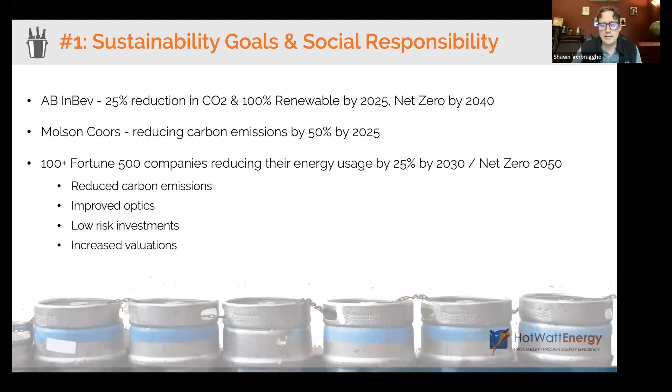I think eventually we should all do our part to roll up to that. One of the big overlooked things about energy efficiency is all the benefits that come in the workplace, especially for employees—like increasing light levels with lighting and reducing hot and cold spots in the office.

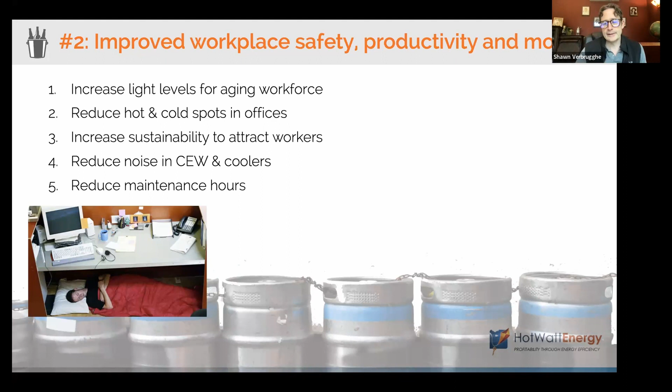Increasing sustainability helps attract workforce—the younger generations. I've written a bunch of papers on this about how that's really one of the drivers for the millennial generation. Attract them and keep them, and show them we're doing good stuff.

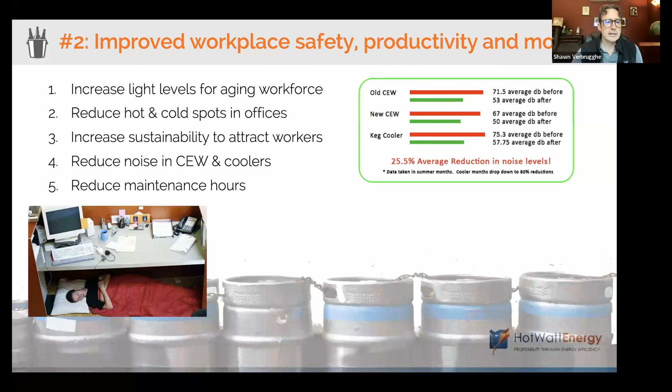Reducing noise in CEWs and coolers—for those who have done a variable air volume project in your keg cooler or CEW, we can reduce noise levels drastically, which is a huge safety increase. And then there's reduced maintenance, obviously.

This tells a story about cutting your energy usage 30%, which can increase your bottom line profitability by at least a couple percent. It just depends on how big your energy budgets really are.

Average IRRs, which are important to look at for building retrofits, are typically 20-25% or greater, sometimes up to 50, 60, 70%—which is what's really attractive about energy efficiency. It's not as sexy as solar, but the ROIs are much better. The average payback on an energy retrofit project is 25 to 30 months.

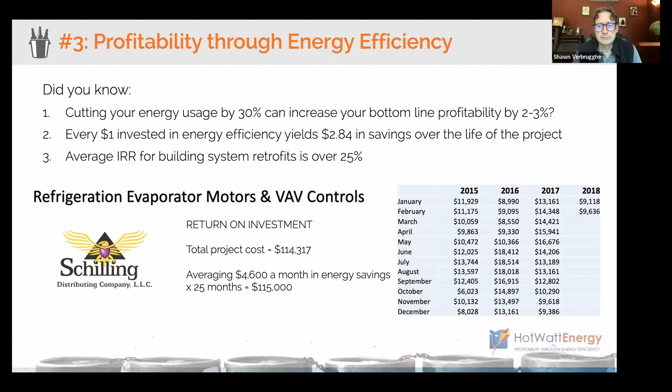There's a project we did for Schilling Distributing—let's see, it was about $4,600 a month in savings. I won't get into all the details on that, but this is where I try to use Yoda as my guide here.

I think these are the steps that I really try to get people to look at taking, and first is Energy Star benchmarking.

Energy Star—most of you know that brand—has the commercial buildings energy use portfolio, which I'll show you in a second. Really, benchmarking is about understanding how efficient my building is right now.

You'll be able to compare it to other buildings like yours in your region, which is important. Second is understanding utility incentives and tax deductions that might help drive the paybacks down and help the projects move.

Obviously, identifying the projects is key. Figuring out how to implement them and how to fund them is something we should talk about, and we will talk about briefly.

What's the overall goal? Improving your NOI. I know each and every one of you are very efficient in your operations already, so to me the energy budget is kind of like this black hole a lot of times where it hasn't really been looked at or considered. If it hasn't been, this is probably the road to start on.

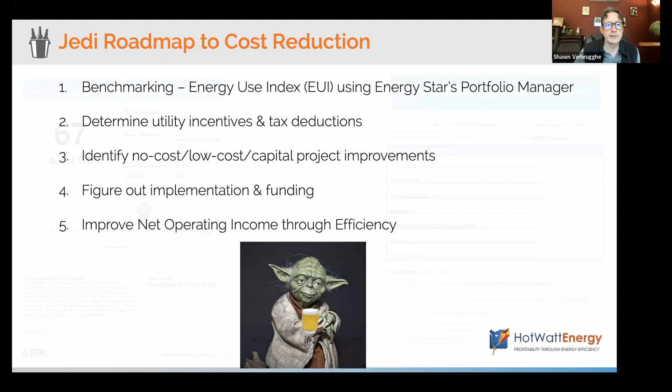So we talked about Energy Star, and this is an example of a scorecard on your left—just like a mock-up. If you're scoring 67 out of 100, you have a lot of room for improvement.

A score of 75 or above will allow you to become Energy Star certified—basically you get a sticker you can put on your front door. But more importantly, it shows where you're at in the big scheme of things.

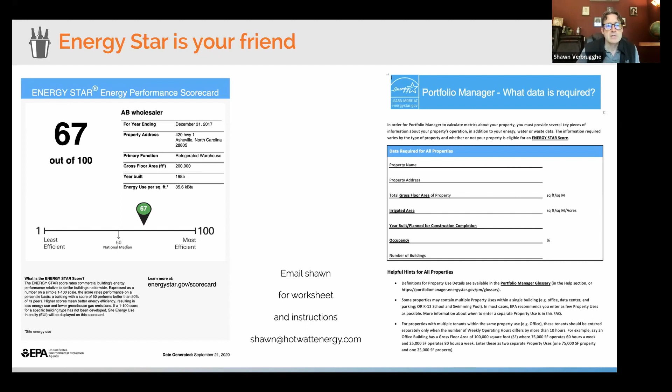The cool thing about Energy Star is if you're a 67, you can say you want to shoot for a 77 or 85 or whatever that number is, and figure out how much energy savings dollars that would equate to, which is really cool. So you can kind of reverse engineer it.

Your utility, a lot of you guys are on Consumers and DTE. This is kind of the map of everything. If you're not on Consumers or DTE, you can use the DSIRE USA website. You can type your zip code in there and it'll pull up your electrical provider and their business incentive or commercial incentive program, usually called one of those two things.

These are the links to Consumers and DTE. I'll tell you that each one of these programs, and pretty much all programs across the country, have over 100 incentivized applications you can somehow take advantage of. You're not going to use all of them, obviously, because they're categorized into a lot of different things, and a lot of them are lighting, but that's only a chunk of them.

For those of you who have done lighting and gotten a rebate already, you understand the power of, number one, the reduction in energy use, number two, the kind of incentives that can come with it, and the impact it can have visually in your workplace.

The custom incentive is what we try to drive with energy retrofits, and it usually ends up to be a little bit more money. That could be a sidebar conversation if anybody wanted to have it.

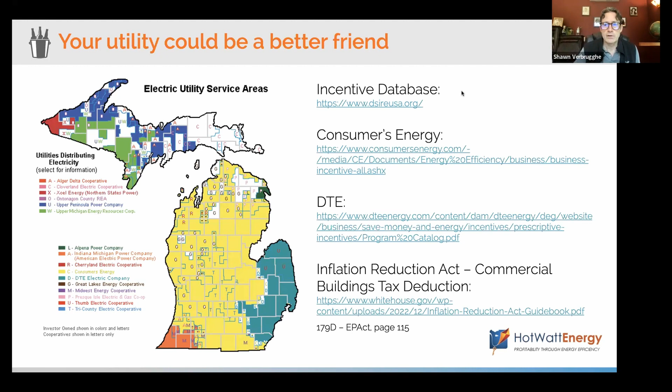All right, moving along here. Let's talk briefly about low-hanging fruit. The number one outstanding thing I try to really push people to do is preventative maintenance and cleaning. This first one is some fellows I was just talking to in Wyoming.

If you look at how dirty these coils are, it's insane, the inefficiency that comes along with that. So clean coils regularly in anything that has a coil, whether it's refrigeration, evaporators, condensers, HVAC, rooftop units, replacing belts, replacing filters, and especially recharging refrigerant, making sure your refrigerant is at the correct capacity on an annual basis.

All of those things right there could save you easily 15%, give or take, obviously if you're out of whack. Now, hopefully everyone has a preventative maintenance contract already in place, but if they don't, I highly encourage you to look at that on an annual basis. It's almost free by the time you take the maintenance reduction out of it that you'll achieve.

Number two, evaporators and controls project. We've done this for several Michigan distributors already throughout the years. These usually have paybacks of 1 to 3 years. We'll talk about that in a second.

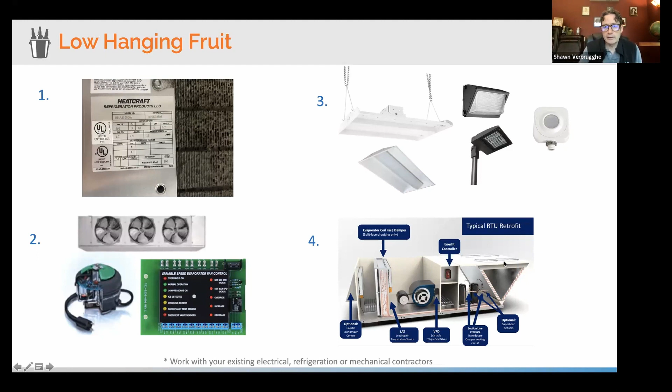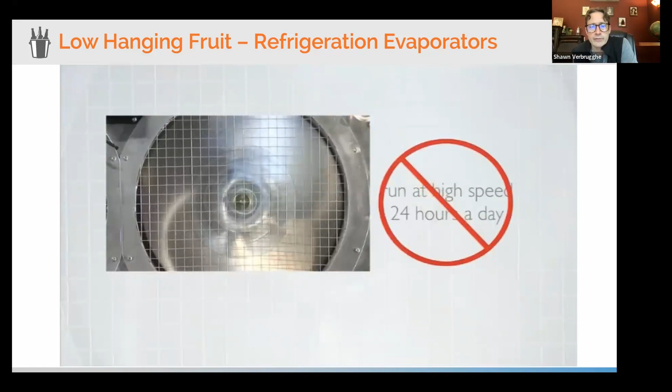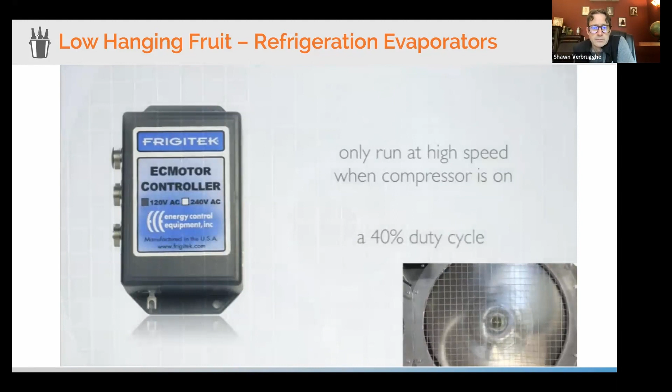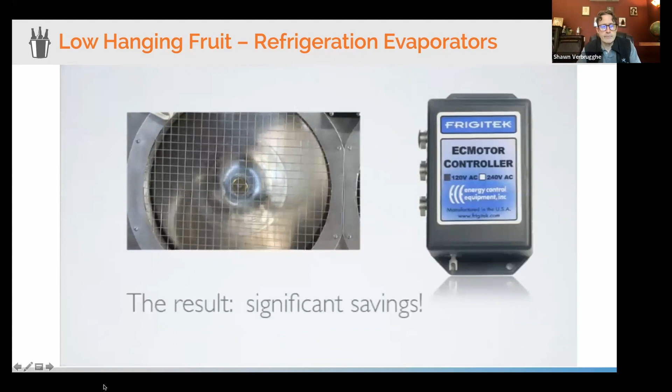All right, so this is a video, I'm just going to let it rip. This is about motors that run at high speed 24 hours a day, for those of you who have refrigeration in a walk-in or a keg cooler. When the system compressor is operating, which for most units is about 40% of the time, that means for the other 60% of the time, the fan motor RPM can be lowered dramatically while still providing the necessary airflow in the box. The result: significant savings. Frigitek works in conjunction with the new 2-speed EC motors that are far more efficient than the shaded pole motors currently found in most walk-ins.

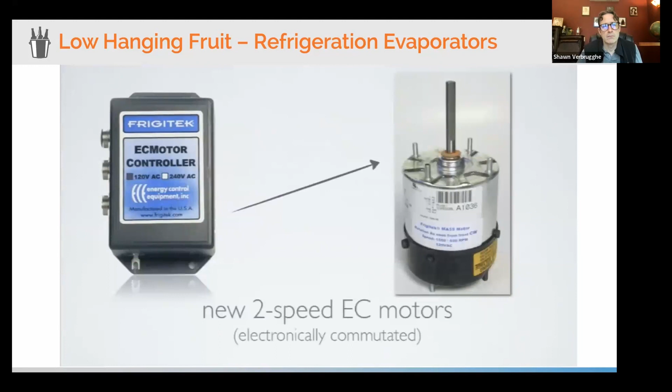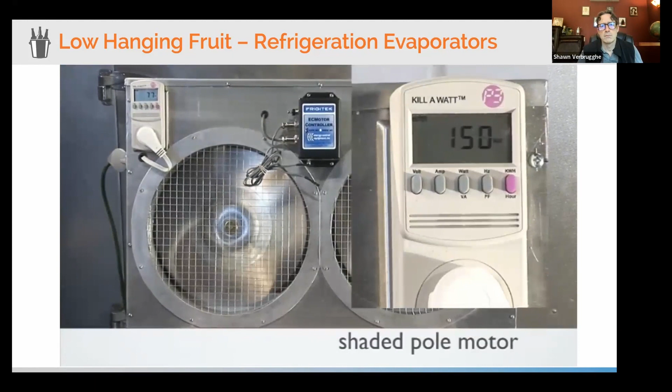Here's a demo unit that will clearly show the effectiveness of Frigitek. To the right is a fan being driven by a standard shaded pole motor. It's consuming about 149 watts. On the left is a new 2-speed EC motor, consuming about half the energy, or about 76 watts.

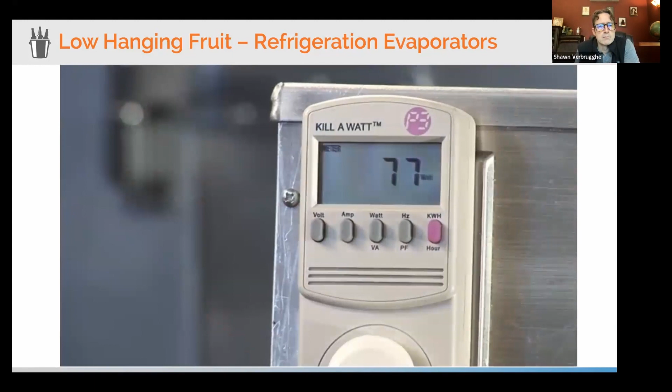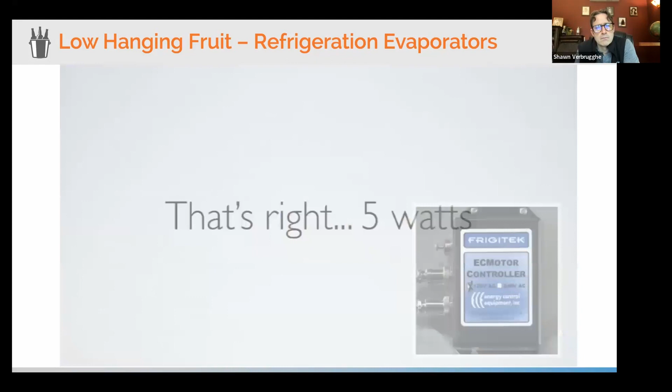Now we will simulate the compressor off cycle. The Frigitek controller will slow the EC fan motor to 600 RPM, and it's now only consuming about 5 watts of electricity. That's right, 5 watts, when before it was consuming close to 25 watts 24/7. When you do the math, this amounts to about an 80% reduction in power usage.

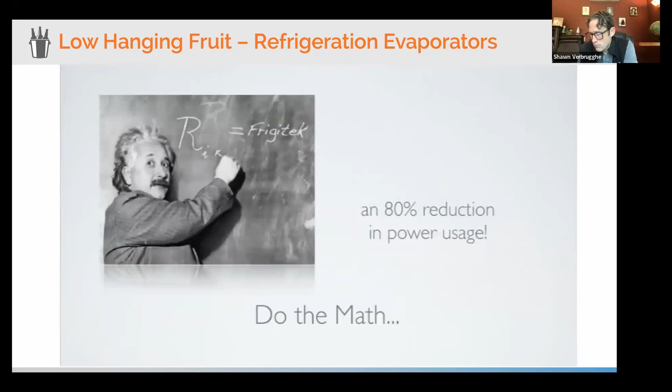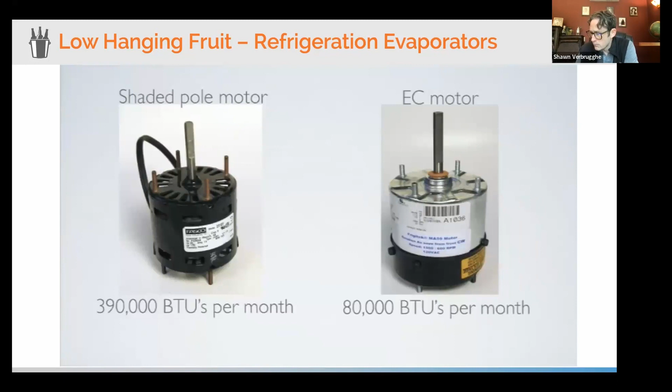Along with this comes a significant reduction in heat created in the box. The standard shaded pole motor will generate about 390,000 BTUs of heat per month. The 2-speed EC motor with the Frigitek controller will generate less than 80,000 BTUs per month. Now, with less heat being released in the unit, compressor runtime will be reduced, again saving energy.

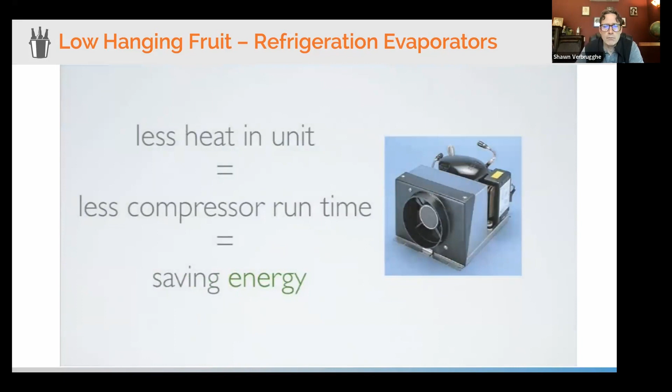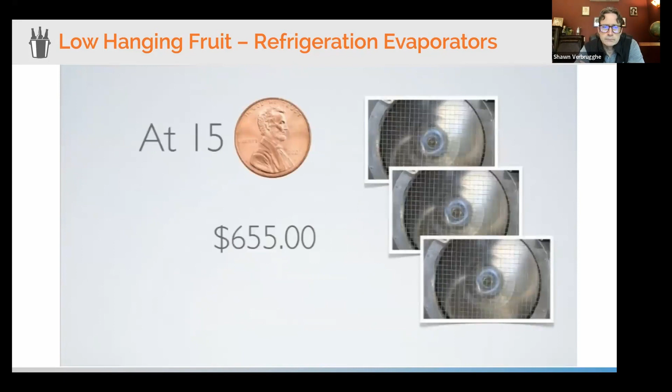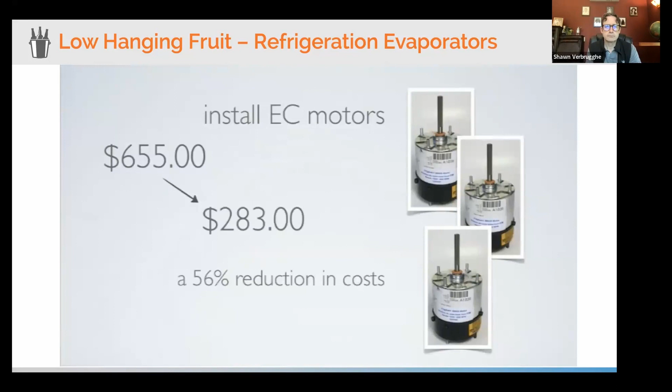Watch how this works. At a price of 15 cents per kilowatt hour, it will cost $655 to operate an evaporator coil with 3 conventional fan motors each year. By installing EC motors, the cost to operate the fans is lowered to $283, a 56% reduction in costs. However, by installing a Frigitek EC controller, the cost to operate the fan motors is reduced to $98 per year, an 84.9% reduction. There is no other single product on the market that can produce this kind of combined savings in a commercial refrigerator.

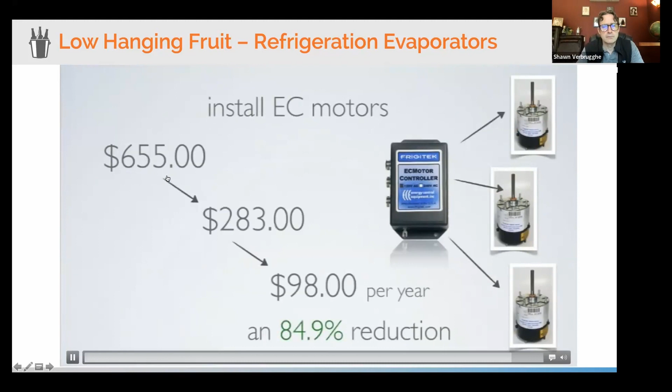So I realized that was kind of a commercial, but the takeaways from that for all of us on this call are a couple different things, kind of like the light bulb scenario. When you're thinking about replacing a motor, you're replacing with a more efficient motor, and then coupling it with a controller, you now have what I call compounded savings. You have the efficiency meeting the conservation, just like you do in that light bulb scenario or that lighting scenario.

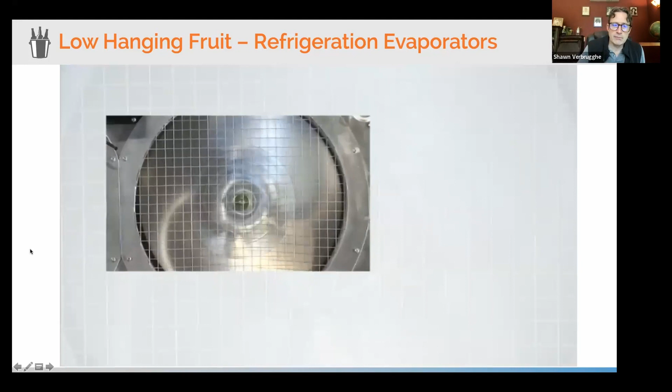And this plays true for a lot of HVAC and refrigeration. The great part about it is when you have that compounded savings scenario, you end up with the custom utility incentive, which is kind of an engineered incentive from the utility, and that's where you get higher dollars. I've seen usually DTE and Consumers will pay for anywhere from 20 to 30% of custom projects, which is pretty huge. And anyways, these motors run - that project right there is a real slam dunk project we've done a bunch of times.

This is another one as an example. If you have RTUs, mostly for single zone RTUs, so it may or may not work in office situations - but if you have RTUs on the rooftop, simply by adding a VFD and controlling your economizer or adding an economizer, and then controlling the secondary damper face that is on the top, and then adding a controller and some logic to it, you're basically reducing the overall energy usage on that device by 30 to 50%.

And I don't really go into this too much, but just so you understand, there's a law called the fan law of physics. It's basically like the more you reduce a fan speed - 10, 20, 30, 40 - you exponentially reduce the energy usage. So it's just important to keep in mind when you're doing projects like that.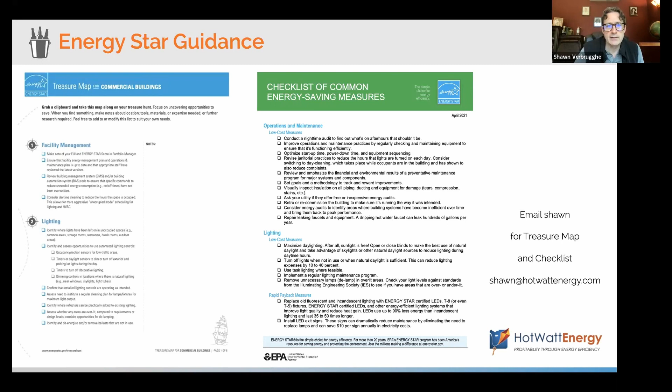In terms of what we can help you with, we look at systems. Refrigeration systems are the number 1 low-hanging fruit, rooftop units are number 2. For those of you thinking about replacing your HVAC or refrigeration, I've had many conversations this year about how to do a life cycle analysis to compare what makes sense moving forward. Not to say your HVAC or refrigeration contractor won't do that, but we're a third party looking at it differently, trying to compare and contrast to give you a good long-term energy efficiency play. So we're here to help you with that if need be.

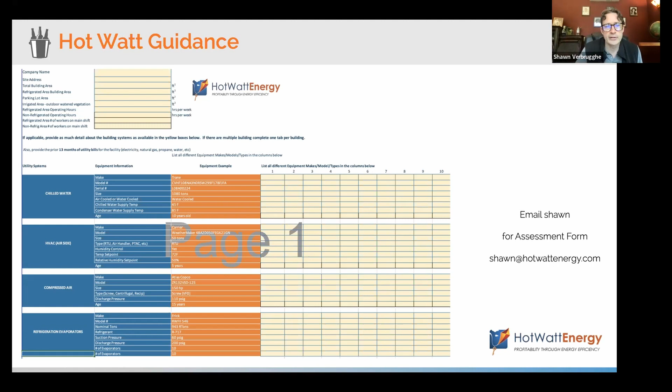But if anybody wants to look at a project, if they have a refrigeration system or RTU system, or really any HVAC or lighting system over 5 years old, it might be worth looking at to see if there's energy savings to be had. So email me and we'll send you the appropriate form to go with that.

We're going to switch gears into project funding real quick. Most beer wholesalers who we've worked with in the past, these come out of capital budgets, but capital budgets don't always exist. Sometimes they're hard to get, sometimes they take time, and I look at it like time is cost of money, right? So there's a couple different easy ways to get into energy efficiency if you don't want to go through that CapEx process internally.

One is called efficiency as a service, which is basically the very simplest format - it's like Spotify, where you're leasing music, so to speak. We work with a couple of lenders, folks who basically purchase the equipment and then own it, and over a period of time share in the savings with you over 2 years, 5 years, 10 years, or whatever it is. We basically do the project, and we also maintain the equipment for you during the course of the term. So it's a real simple, low-hanging fruit way to do things with efficiency as a service.

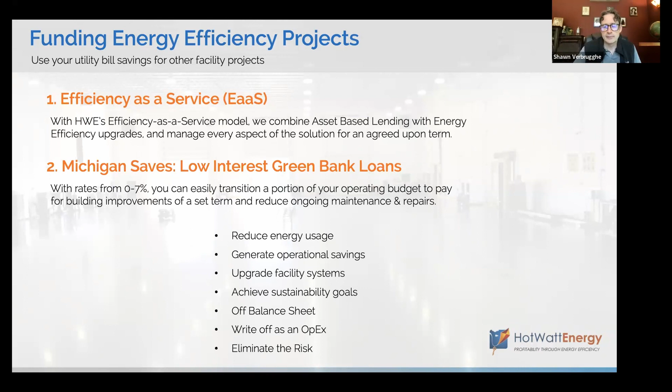But one thing that comes along with any kind of energy efficiency project is you're saving long-term. It's an investment up front, but these projects are saving forever, for the 15 to 30-year life cycle of these systems. So I think that's important to look at.

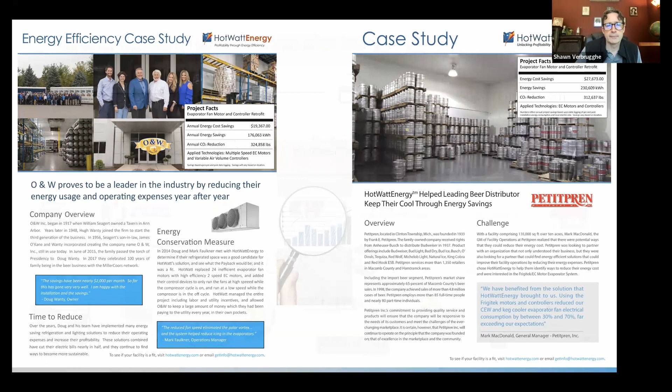And then if you want to get a hold of me - what we can help you do is, either if it's something you want to do on your own with the Energy Star checklists or Energy Star benchmarking, happy to help you at no cost. We like to see this stuff done, and we're all about trying to reduce and repurpose and recycle and upcycle and all that good stuff. So we are really in the business of energy retrofits. We don't do new systems, but we can help you just on the specification side of it.